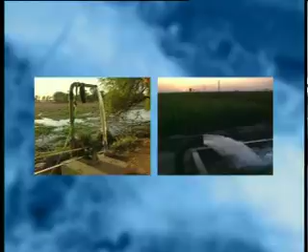As summers approach, the demand for water increases, but the supply remains low. Today, most cities in India are facing acute water shortage. Groundwater being accessible with easy-to-extract techniques bears the brunt of the shortage and is today under great stress. Our groundwater levels have declined sharply all over the country.

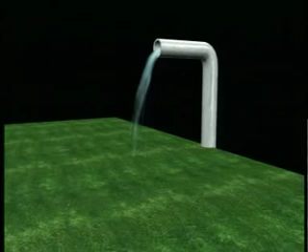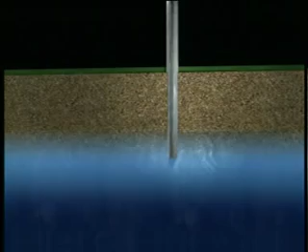In some aquifers, fresh water is underlain by brackish water. As more and more groundwater is pumped out, the brackish water rises, polluting the fresh water, making it unsuitable for drinking. In coastal areas, there is always a threat of seawater intrusion into freshwater reserves as deeper tube wells are dug to extract more groundwater.

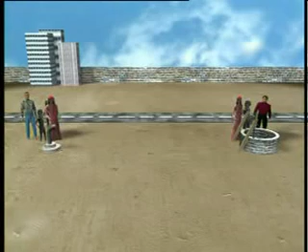Today, we face a serious water crisis because while groundwater continues to be pumped out in huge quantities, very little water is recharged into the aquifers. With rapid urbanization, lakes, ponds, and green areas that contribute to recharge have reduced drastically. Catchment areas have been paved and reclaimed for construction. As a result, even when the rains come, no recharge can take place.

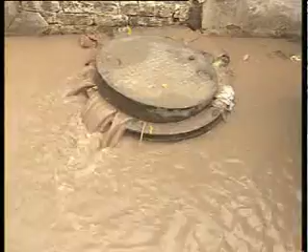Each year, the monsoons bring abundant rainfall to India. India receives an annual average rainfall of 1100 millimeters. But in urban areas, this rainwater is unable to seep into the ground because the land is sealed for miles with concrete buildings and a network of roads. Instead, this precious water gushes out through drains and nalas and flows into the rivers and on to the sea. Billions of liters of fresh water are lost each season this way.

The runoff of urban areas is heavily polluted due to an inefficient sewage system and disposed garbage all around. This wastewater flowing along drains seeps underground and pollutes the freshwater aquifers. In low-lying areas, the downpours leave the city waterlogged. Roads get flooded as the natural drainage systems are blocked. The water slowly evaporates and no recharge can take place.

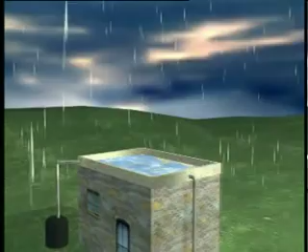In urban areas, the need for rainwater harvesting is critical. Water is already the scarcest commodity. As demand increases further, the situation could spiral out of control. Rainwater harvesting is simply catching rain where it falls and using it for storage or recharging the underground aquifers.

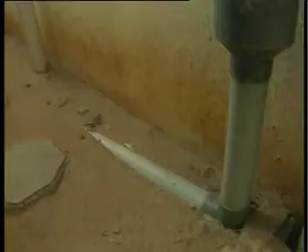Everybody can harvest rain. All that is required is a catchment area, the surface that receives rainfall directly, like the roof of a building, a terrace, or a courtyard. It also needs pipelines and drains. Most houses already have downpipes in place. These carry rainwater to the gutters. It is here that a small change can be made. This change consists of diverting rainwater either to a storage tank or to a recharge structure.

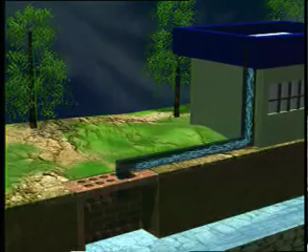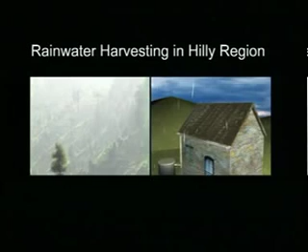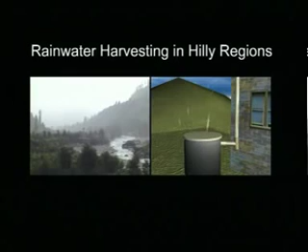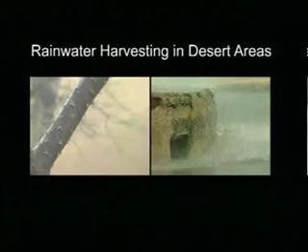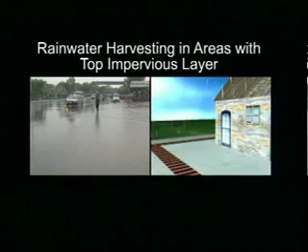Desert areas receive low rainfall. The water table is very low here. In such areas, it is beneficial to store rainwater in suitable structures, as is practiced in the desert state of Rajasthan. Areas which have a very thick top impervious layer don't allow rainwater to percolate down. These places suffer from frequent waterlogging and are not suitable for recharge structures. Constructing recharge wells would be very expensive here. The best alternative is to build storage tanks.

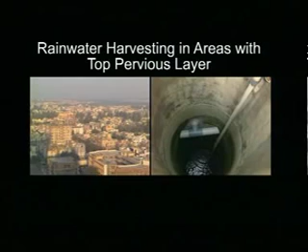Areas with a top pervious layer are most suitable for direct recharge through structures like recharge pits, trenches, and abandoned wells and tube wells. To build these structures, it is essential that the water table is at least 8 meters below the ground level. The unsaturated zones above the aquifer provide space for storage of water and also allow natural filtration of water percolating down.

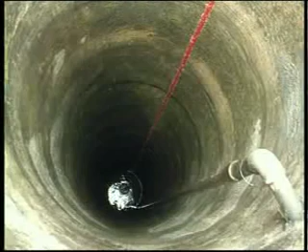Earlier, dug wells and tube wells were used to extract groundwater, but many of these have now gone dry because of declining water levels. These abandoned structures can be utilized for recharge after proper cleaning. This helps save the construction cost.

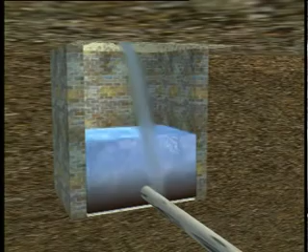In small houses or a campus, rainwater collected from the rooftop or terrace is diverted by downpipes through a filter mesh to a desilting chamber or filtration tank. This tank removes silt and other impurities and also acts as a storage tank for storing excess runoff. From here, this water is diverted to the recharge structure, which may be a pit, trench, abandoned structure, or a combination of these, depending on the requirement.

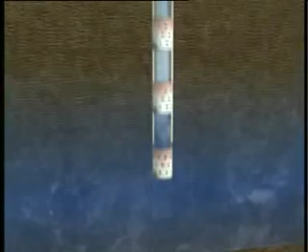Usually, the front yard of a house slopes into the road. Water therefore flows out. The driveway of the house can be designed in such a way that there is a slight dip in the center, forming a trough. A bore pit or trench dug at this point can absorb the rainwater.

In a locality-level water harvesting system like an apartment block, rainwater runoff from individual houses can be harvested in common areas. Colonies should collectively build rainwater harvesting structures so that precious rainwater is not lost to drains and gutters but goes to replenish the aquifer. Millions of liters of rainwater can be harvested in this simple way.

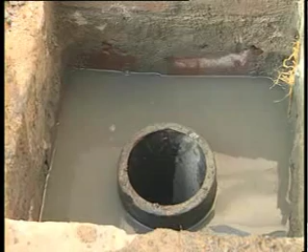During the monsoons, a lot of water accumulates in low-lying areas of gardens, parks and ponds and remains stagnant for long periods. This water can be harvested by making pits or trenches with or without a borewell in the low-lying area. The pit should be filled with filter media such as boulders, gravel and coarse sand in graded form. The borewell must end in the permeable formation.

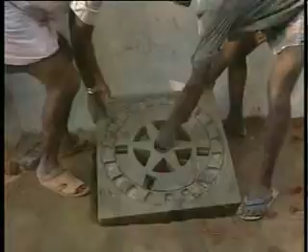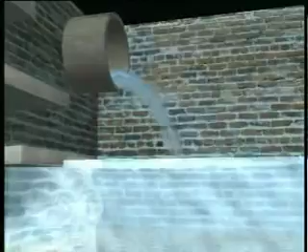With growing urbanization, paved areas such as roads and parking lots are increasing day by day. These provide a lot of runoff during the rainy season. Along roadsides, storm drains with recharge pits, trenches or shafts can be constructed to recharge the underlying aquifers. This will also ensure that roads don't get waterlogged following heavy showers.

A recharge pit is like a soak pit. It is constructed 1 to 2 meters wide and 2 to 3 meters deep. It is backfilled with filter media in graded form. This structure is suitable for small houses, a campus, or for inside a storm drain. A recharge trench is constructed along the boundary of the house or campus, across the slope of the ground. The trench is built half to 1 meter wide and 2 to 20 meters long depending on the requirement. It is backfilled with filter media.

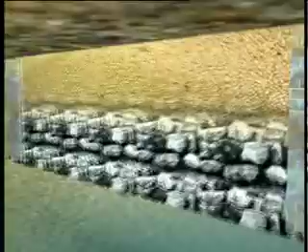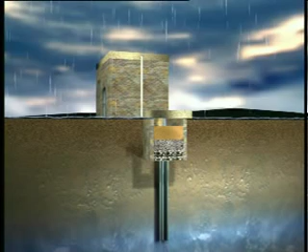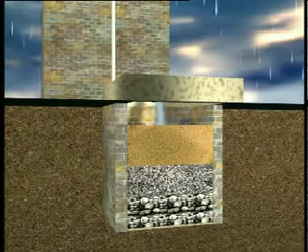In areas which have a thick top impervious layer, rainwater is not able to directly seep into the aquifer. Here, the recharge structure needs to penetrate through this thick layer to reach the pervious layer. For recharging the deeper aquifers, a shallow shaft with recharge well is constructed. The shaft is 2 to 5 meters in diameter and 2 to 4 meters deep. It is backfilled with filter media. Inside the shaft, a recharge well is constructed for recharging the stored water in the shaft.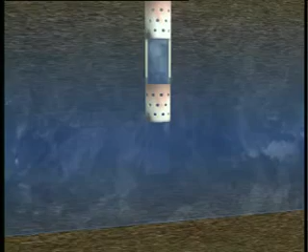An abandoned well or tube well can also be used to recharge the deeper aquifers after proper desilting. A recharge well is like a normal tube well. It penetrates the impervious layer and ends in the aquifer. A settlement cum storage tank is constructed near the well for desilting of the runoff and storage of excess water. Clear water from the settlement tank is diverted to the recharge well for recharge.

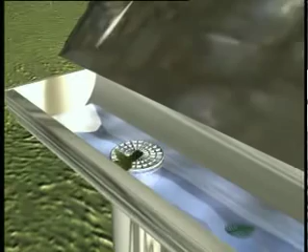In some areas, such as hilly regions, groundwater recharge is not feasible due to the hydrogeological conditions here. But these areas receive heavy rainfall, and the runoff can be stored in tanks for domestic use. For this, runoff is directed from the roof area by a drain pipe to a storage tank. A mesh filter at the mouth of the drain prevents leaves and debris from entering.

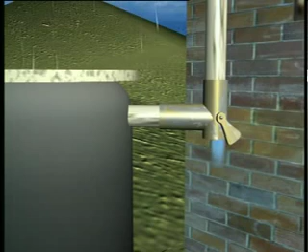A first flush device on the downpipe ensures that runoff from the first shower is flushed out, as it may carry pollutants from the air. The water can then be diverted to a charcoal or sand water filter for filtration before storing in the tank. For drinking purposes, this water should be properly chlorinated.

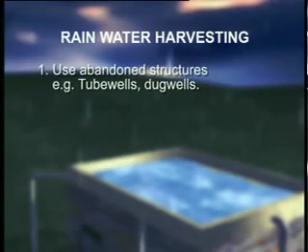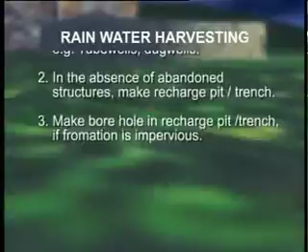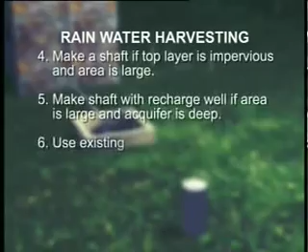Having discussed the various techniques of rainwater harvesting, there are some important things to keep in mind. If available, use abandoned structures like tube wells and dug wells for recharge. In absence of these structures, build recharge pits or trenches. If there is an impervious top layer, then make a borehole in the recharge pit or trench. If the top layer is impervious and the area is large, build a shaft. If the aquifer is even deeper, then build a shaft with a recharge well. In case of rooftop rainwater harvesting using an existing tube well, use an online filter. When the recharge structure is not possible, store rainwater in tanks.

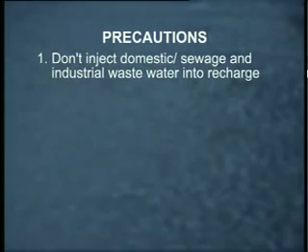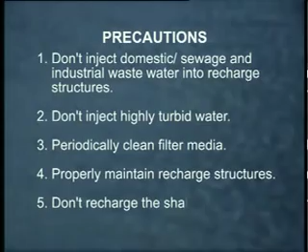There are also some precautions to be taken. Don't divert domestic, sewage or industrial wastewater into the recharge structures. Don't divert highly turbid water into the recharge structures. Periodically clean the filter media. Maintain the recharge structures properly. Don't recharge in areas where the water table is shallow, that is less than 8 meters below the ground level.

A collective and united effort is required to make rainwater harvesting a successful effort. If each and every household and locality can practice rainwater harvesting, water will never again be in short supply. Water is precious. Protect it, save it, conserve it, recharge it, recycle it.